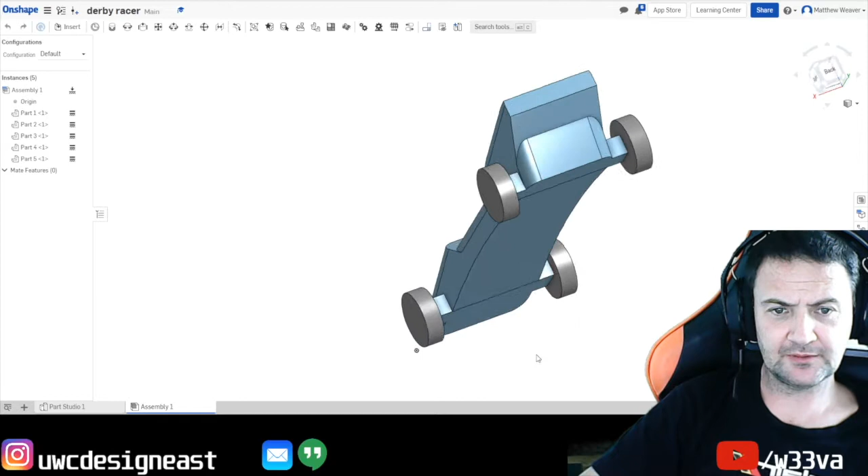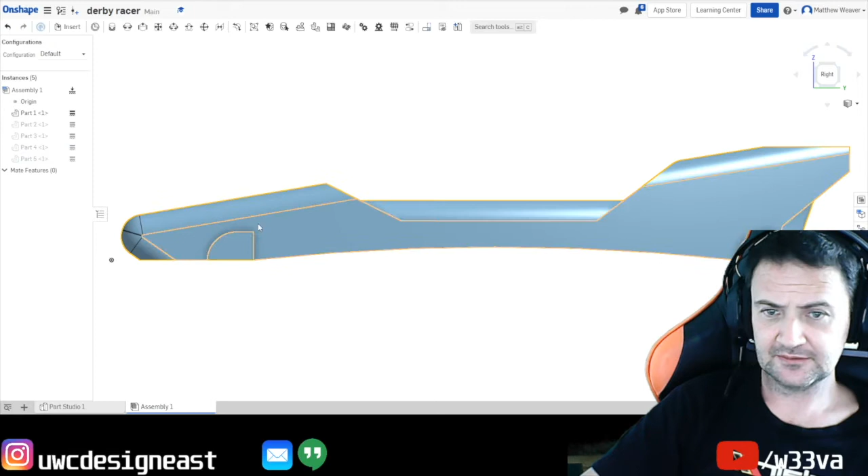In this video, we're going to take our Pinewood Derby car and put it into a 1:1 scale, so that's the actual size, and we're going to have different views so that we can use these views as a template. We're going to have the side view without the wheels, so if I just take those wheels away for you, so that we can use this as a template to cut out the side.

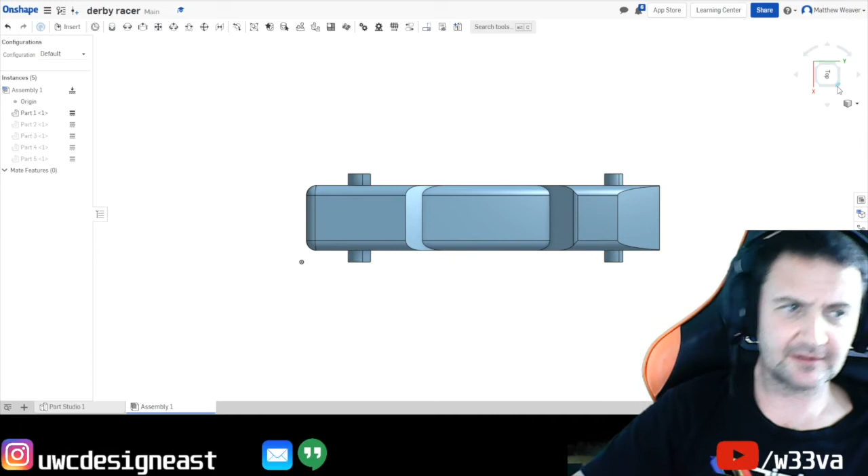We're also going to have the front view. I'll zoom out a bit so you can use that as a template, and we're going to have the top view. Okay, now obviously it's quite difficult to do it the way I've done it by moving the view cube around, but with this new way it will be a lot easier.

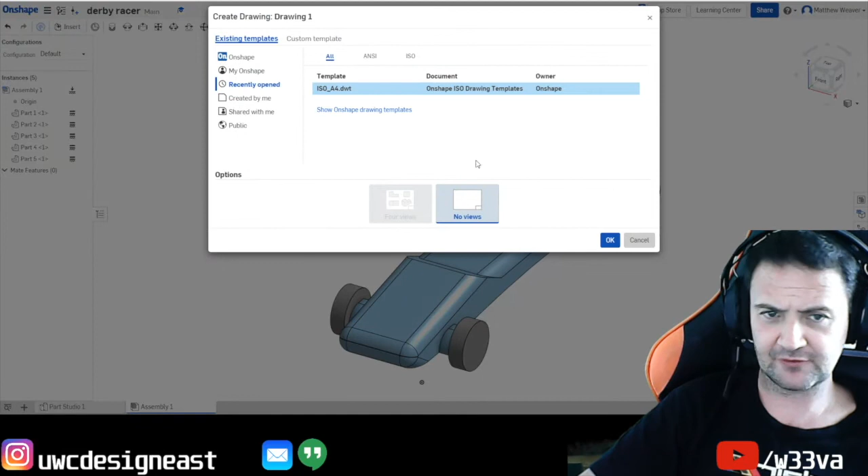So once you've got your model in front of you and you're happy with it, what I need you to do is go and press the plus, which is at the bottom left. That says insert new element, and you're going to create a drawing. Here, go to custom template. Now the piece of wood that you're making your car out of does fit on a landscape piece of A4. So ISO A4 millimeters, and we're going to go to third angle.

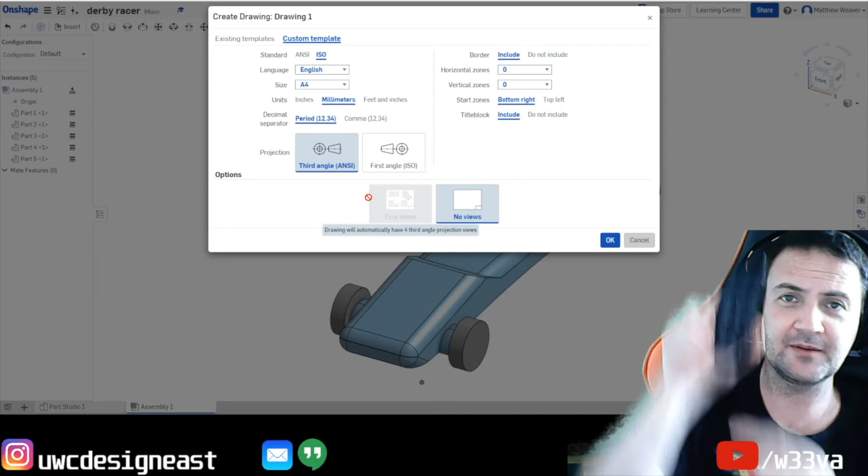So the difference between first angle and third angle is that if I was looking at this controller and this was the front, then in third angle the top view is on the top and the bottom view is on the bottom, and this view here is on that side and this view there is on that side. And with first angle everything is different. So with first angle the top view is actually the bottom of it because it's projected through and makes things a bit confusing. So we're going to go third angle. So ISO English A4 millimeters and third angle, and then OK.

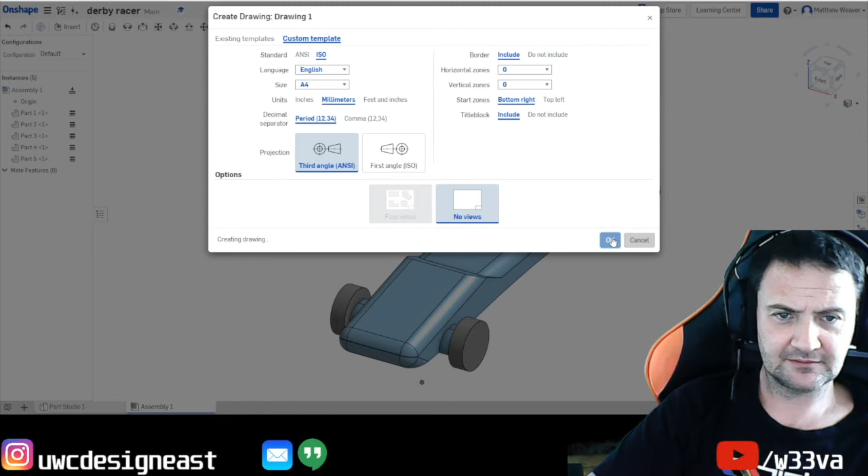Now that's going to open up a new document, and the first thing it's going to do is just ask us what part we want. Now if you want the entire car, you would go to this one here, Part Studios, and click that. But we don't want the entire car because we're not making the wheels. The wheels are already made. We just want the side of the car. So you can actually unclick that and just click Part 1, which is the first thing you did.

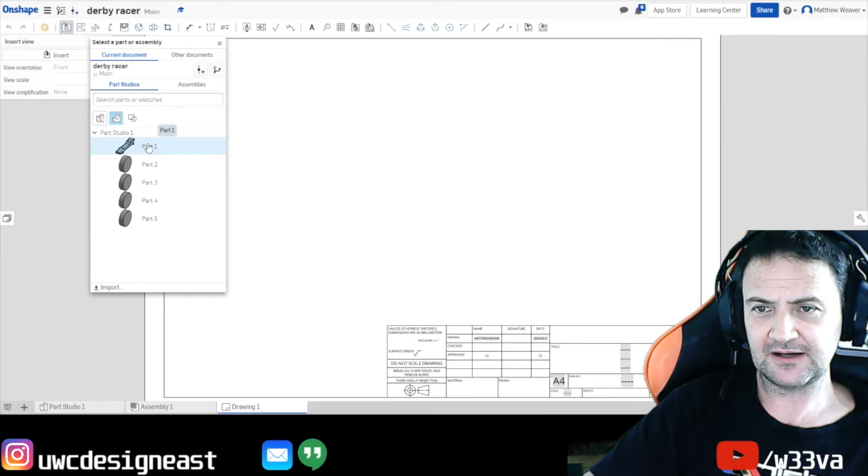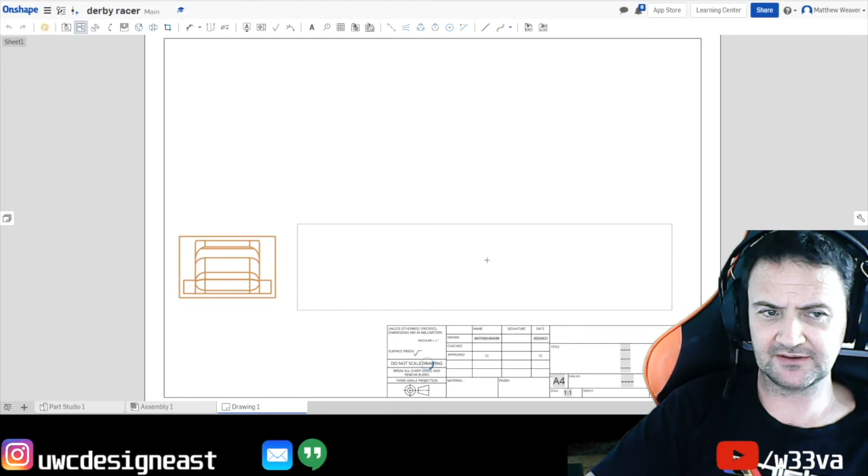And you can see the view scale. Well, we're going to go 1:1, so it's the actual size, which is at the top. See, that's smaller. And we're right at the edge here. We're going to click. So already that is the front view. And now what we're going to do is the side view. So you see projected view, make sure that's on. Come to the side and you can see it's gone long. And that is the side view. And then we click that again, and this time I'm going to go directly above, and that's the top view.

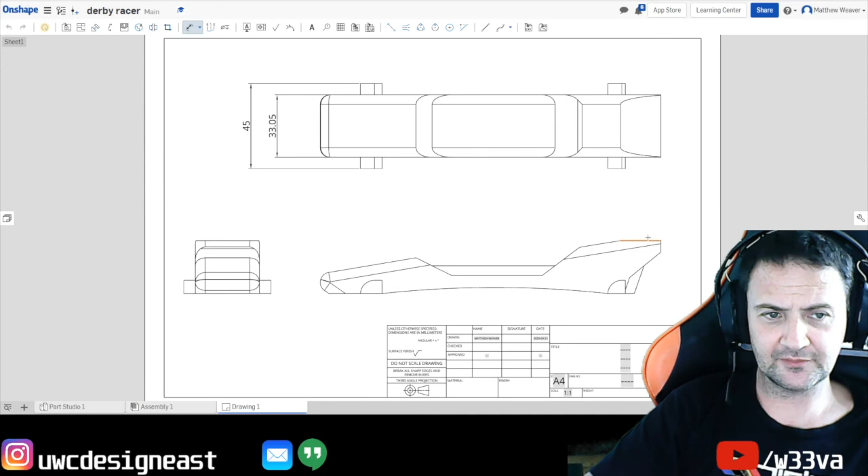Now, if you wanted, you don't have to, but you could check things. So you could add a dimension from there to there, and look at that, the wheels are 45 millimeters apart. Or we could go here to here. Okay, or you could do the height, 28. So already we know that that's actually 3 millimeters more than I have. So this part here is the part that I would cut from the waste material here.

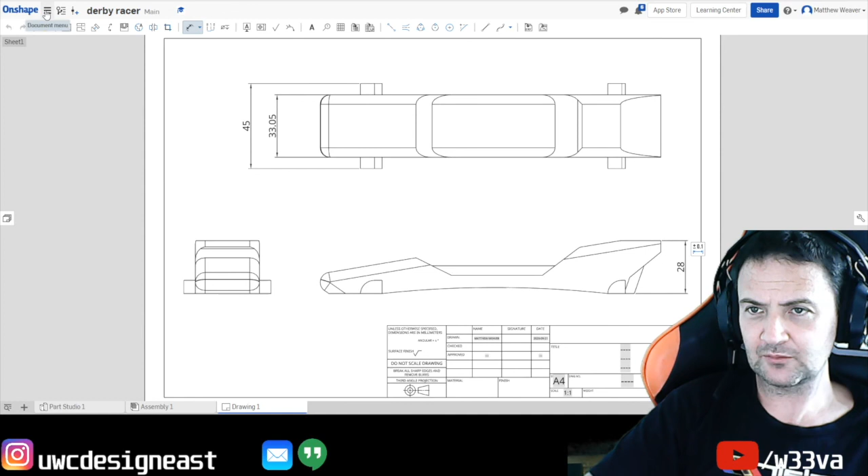Okay, once that's done and you're happy with it, what you do is you go to the three lines, the document menu, you go to print, and it will look like this. You make sure that's 1:1, okay, there, and you see it's A4, and then you're going to click print and fill the page up. Okay, when you've printed that and it's on A4, then that takes you to the marking out stage, and that's all there is to it.